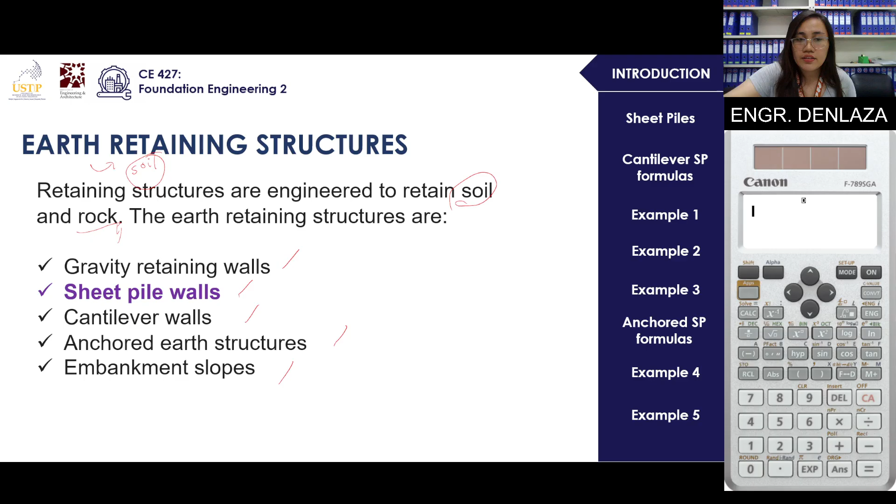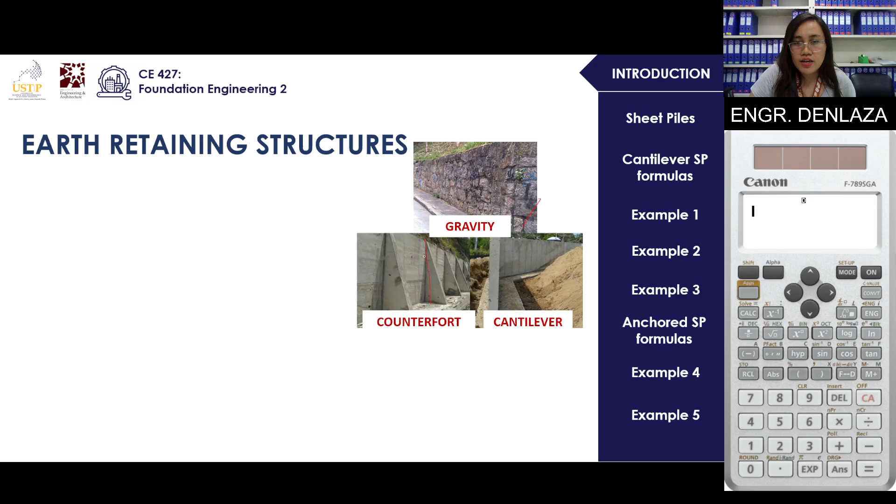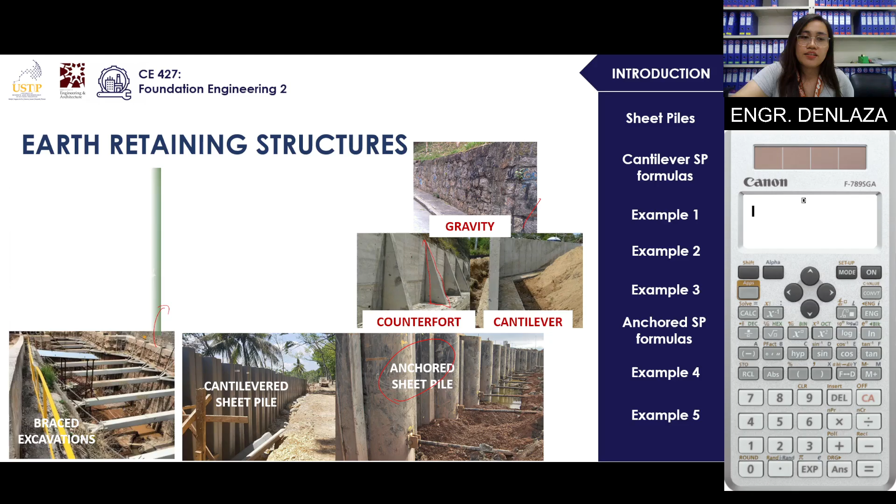Okay, so this is what I mean by earth retaining structures in real life scenarios, guys. There's the gravity retaining wall, as you can see. There's the counterfort - if you notice the bracing which is in the shape of a triangle - and the cantilever. Then here are the anchored sheet piles, the cantilever sheet piles, and braced excavations. Braced excavation will be discussed next week - braced cuts, braced excavation, or braced shorings, as well as your coffer dams. So that's how I'd introduce it.

So let's start with the sheet piles. Sheet piles, okay. Let's try to tackle first the types of sheet piles.

There are several types of sheet piles, by the way, guys. There are sheet piles made of cement, fiber reinforced plastic, wood, and the most common nowadays, especially with the ongoing news, are steel and iron. I think it's a balance between affordability - being economical - and accessibility or portability, since it's easy to install compared to others. Although some others are easy too, but it probably costs more, or it could be the other way around.

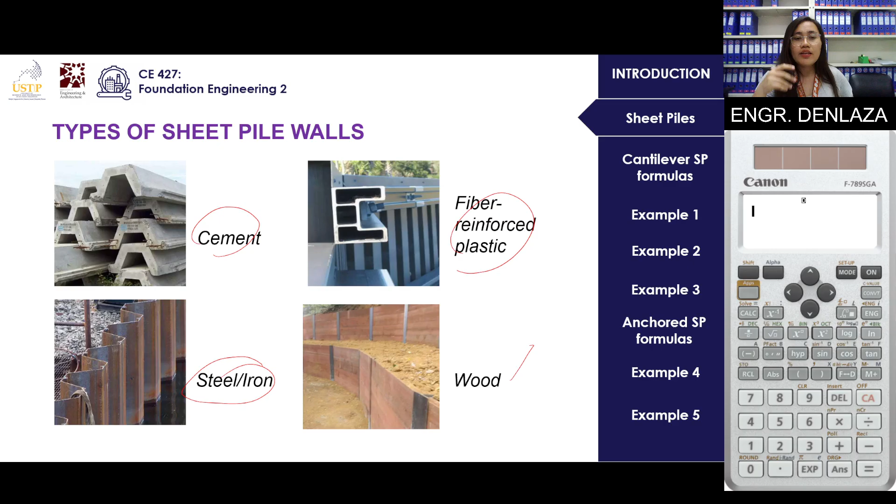I think steel and iron are the most common ones, and that's what you see in the news - where it was said that the depth or original length of the sheet pile should be 12 meters, but it turns out when they pulled it, it was only around 6 meters in length that was embedded. So that's the kind you see in the news - these are examples of steel or iron sheet piles.

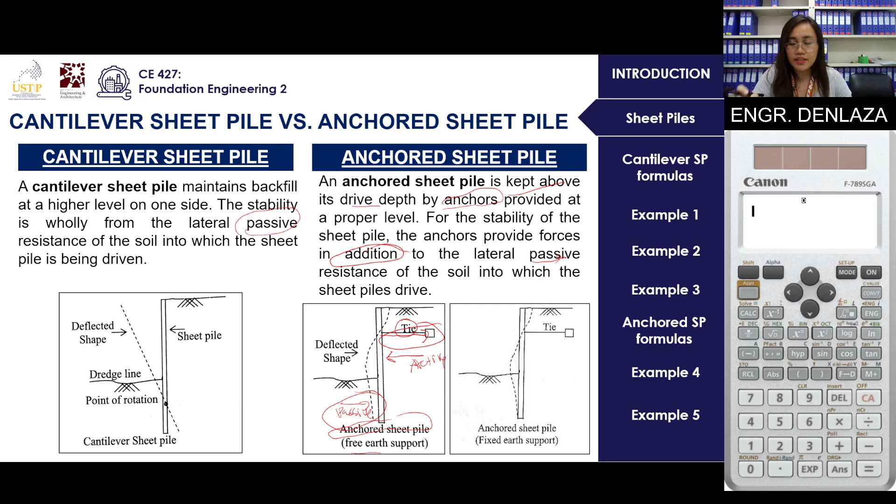So there are two types of support methods for anchored sheet piles: free earth and fixed earth, wherein for free earth it can rotate, and for fixed earth it is cast in place.

So let's try to analyze a problem dealing with cantilever sheet piles. Now let's try to solve a problem. We don't have formulas yet, so let's check first.

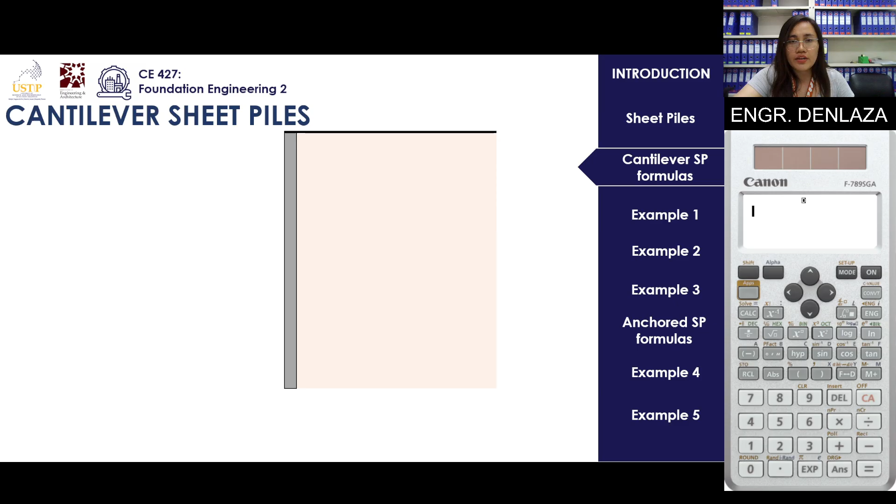This is your earth retaining structure, the top of backfill, and this is your dredge line. Let's label them as height H and depth D. This is what is meant by the dredge line, where you can see it.

And this pressure diagram, who can tell me if it is active or passive? What kind of pressure diagram is it? It pertains to... okay, this pertains to your active pressure.

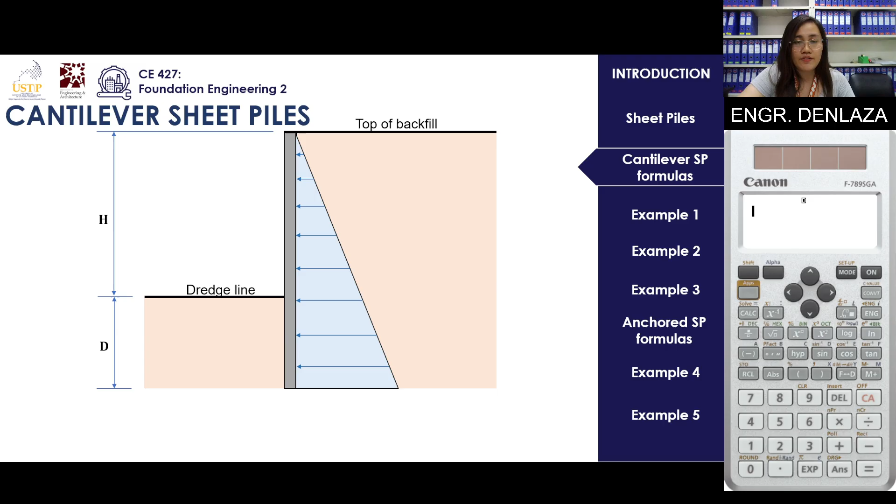That's active earth pressure, and this is your stress at the bottom. You know that when dealing with force, especially the triangle, the centroid of a triangle could be at 2/3 or at 1/3. So this is designated as FA and it has this formula: 1/2 stress times H plus D.

Is this a new formula or not? It's not new. Remember before, stress is equal to what? Gamma H KA, right? Gamma H KA.

And this is just plugged in here. Remember we have this formula for force: 1/2 gamma H squared KA. So this squared height here is factored out because what you're using here is stress. So this other H here pertains to this height. So H plus D, the total of that, is just the height.

Similarly, for the pressure diagram, it's the area. So the base is your stress, right? Remember I told you that stress is the base, and in order to get the entire force, all you have to do is use the area of the pressure diagram. So that's going to be one half base, which is your stress, times the height.

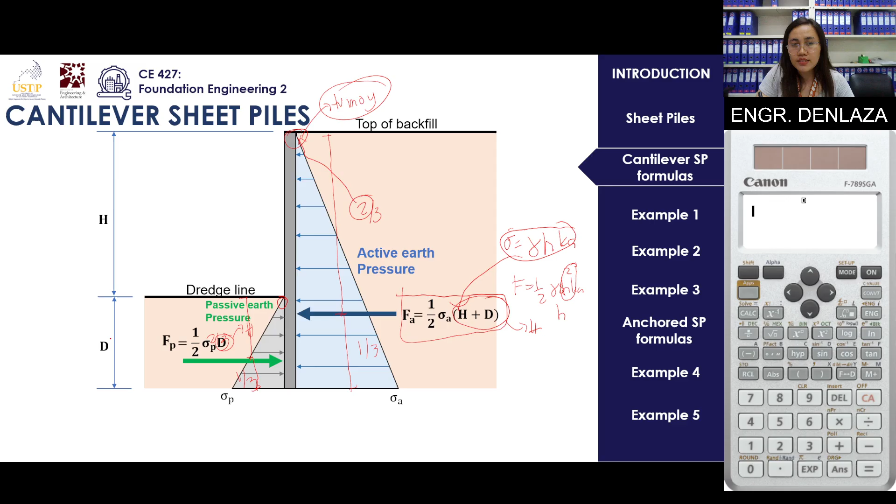And we treated D here as our sole height because you cannot say it's still H plus D, because if you notice, the passive earth pressure is at the dredge line and below - it doesn't reach above the dredge line. So note that H is the depth of soil retained, height of backfill, and D is the depth of embedment or depth of penetration.

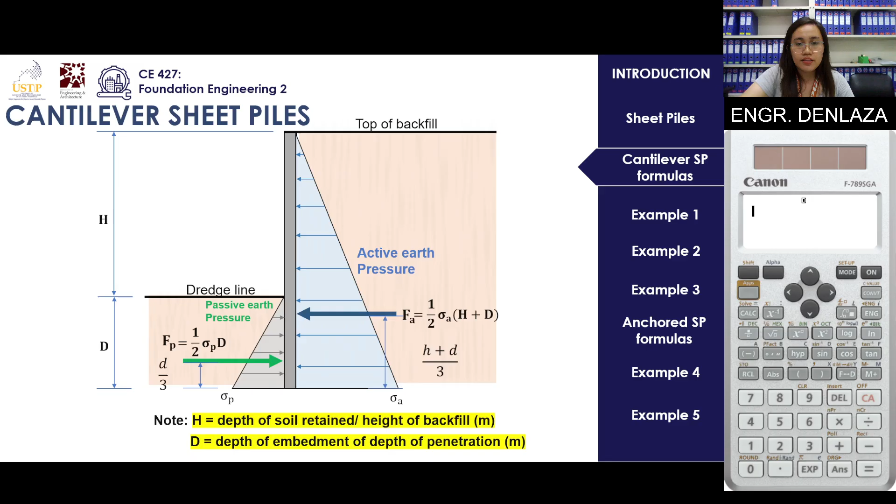If you're asked to get the location from the bottom, that's just going to be H plus D over 3, and D over 3. But if you're talking about from the top of the backfill or the dredge line itself, that's another story - that's going to be two-thirds. There are more equations involved. So if you are to take moments, typically it's at the bottom for cantilever piles, unless there's something from the top of the surface. So typically you take moment at the bottom - don't forget the coefficients for the equations and the pressure.

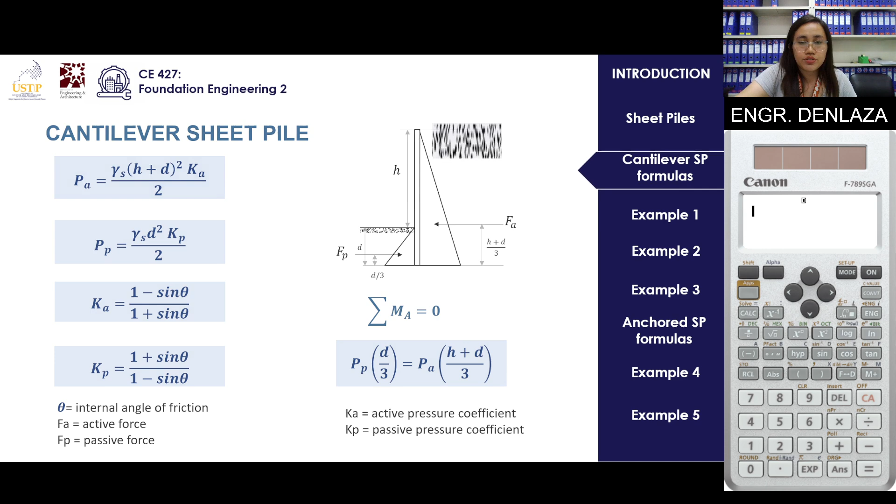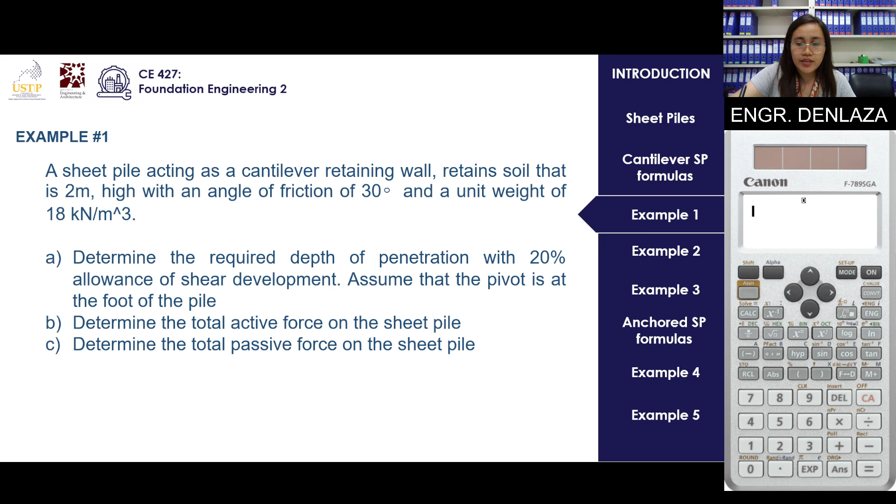Let's try to solve example number 1. A sheet pile acting as a cantilever retaining wall retains soil that is 2m high with an angle of friction of 30 degrees and a unit weight of 18 kilonewton per cubic meter. Determine the required depth of penetration with 20% allowance of shear development. Assume that the pivot is at the foot of the pile - meaning you take moment at the bottom of the pile. Also determine the total active force and the passive force for letter C. Let's solve this problem.

For letter A, let's look at the solution - first make your illustration. You have the backfill with height of 2m, and below that is D, the depth which is unknown. By default, for these kinds of problems, when you see an angle given, as long as they're not asking for something else, automatically get both the active and passive coefficients, or just active if passive isn't needed. So always the first step is to illustrate, then get the values for the coefficients.

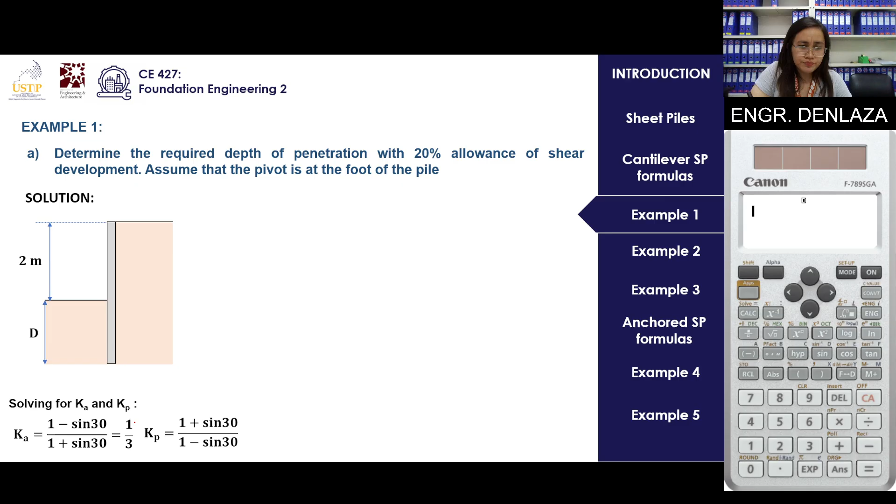Get Ka and Kp. Ka is going to be 1 minus sine 30, which is 1/3. Then Kp is 1 plus sine 30. Is that right? If you flip it - the coefficient of active is the inverse of passive. So if this is 1/3, what's the reciprocal of 1/3? That's 3. So you don't need to stress yourself over these coefficients.

Let's illustrate your active side. That denotes your active stress, and here's the existing formula - that's going to be 1/2 times H plus D. H here is labeled with value 2m. But the D, or the depth of penetration, is yet unknown - that's what we're solving for. For the passive side, here's the equation - that's going to be 1/2 stress, P, and we're solving for FA and FP.

Let's expound the stress for FA that we're solving. The equation should be gamma times H times KA. Gamma is 18. H is 2 plus D, because it's the entire height of your pressure diagram. Then 1/3 is your KA. So we have 2 plus D there. This is the equation - always don't forget about this.

To simplify this equation, you don't need to solve for the value of D yet. What you do is isolate all the constants that don't enclose the 2 plus D term. Just retain this 2 plus D itself - squared. So simplify 1/2 times 18 times 1/3. That's the simplification. If you still don't understand how to simplify this when it seems difficult, just put in a value of 1 for it temporarily - treat it as 1 - and you will get the value. I think you'll get 3 here. So just what do they call this?

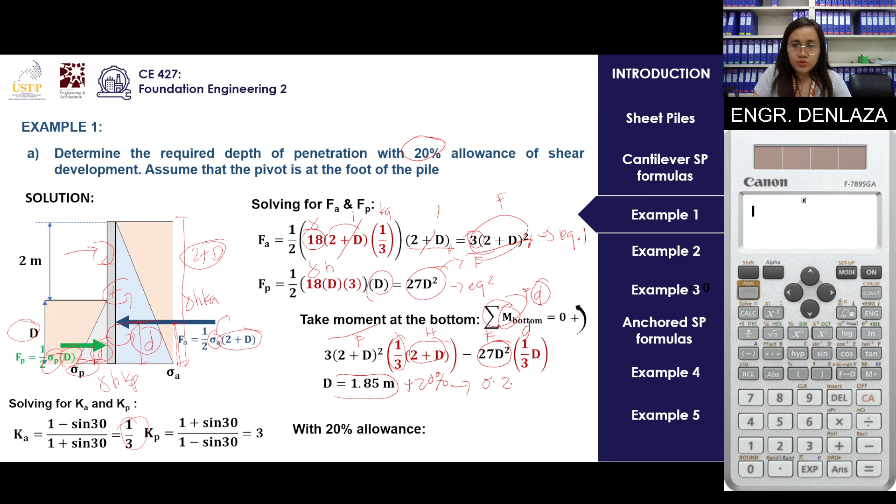How do we add 20%? What you do is just multiply it by 1.2. How do we convert 20%? That's 0.2, in decimal. But why 1.2, and not just 0.2? Because you assume the whole is 100%, which converts to 1. But since you're adding 20%, it's 1 plus 0.2, which gives you 1.2.

So all you have to do is multiply 1.85 by 1.2 and you will get 2.22 meters. So that's your final answer for this first problem.

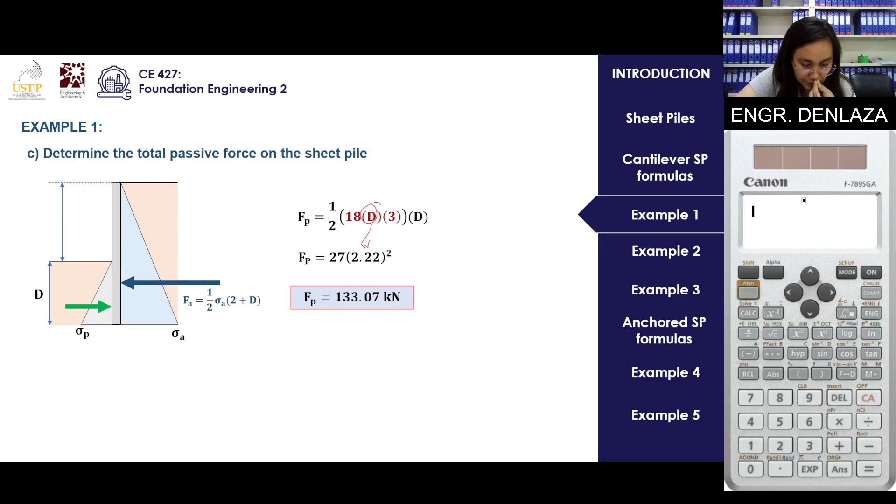Now what if we are asked to find the factor of safety of the sheet pile? How do we do that? Since we already have two values obtained, which are the active and passive, you get the ratio of the two: passive over active.

This ratio should be greater than 1. Recall from before: when can you say a structure is stable? If your factor of safety is greater than or equal to 1. If it goes below that, failure occurs and your structure will fail. So always consider designing with a factor of safety greater than 1.

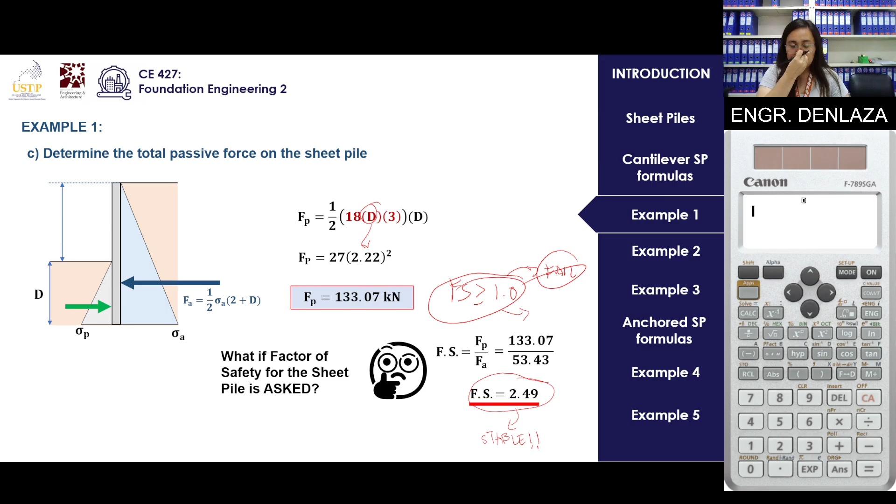Example number 2: A vertical sheet pile supports a horizontal backfill having a height of 4.5 meters. The backfill has a unit weight of 19.67 kilonewton per cubic meter and an angle of internal friction of 35 degrees. Calculate the depth of penetration, the total active force, and the maximum bending moment in the cantilever sheet pile.

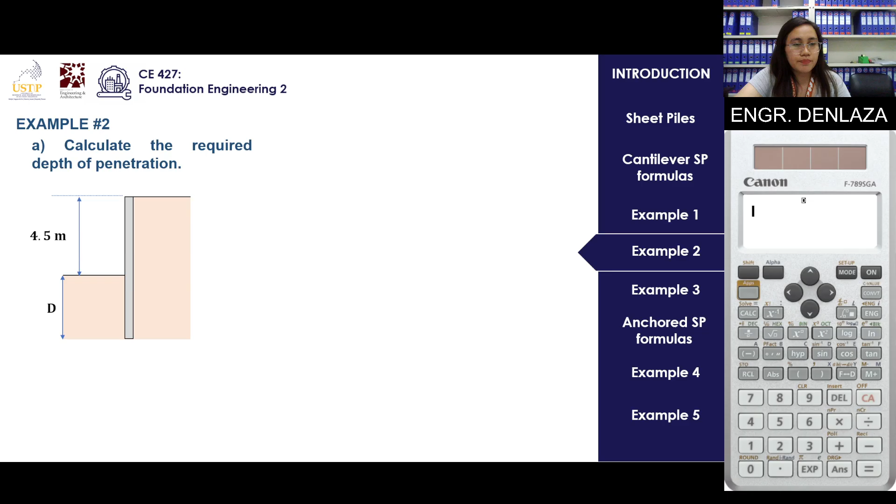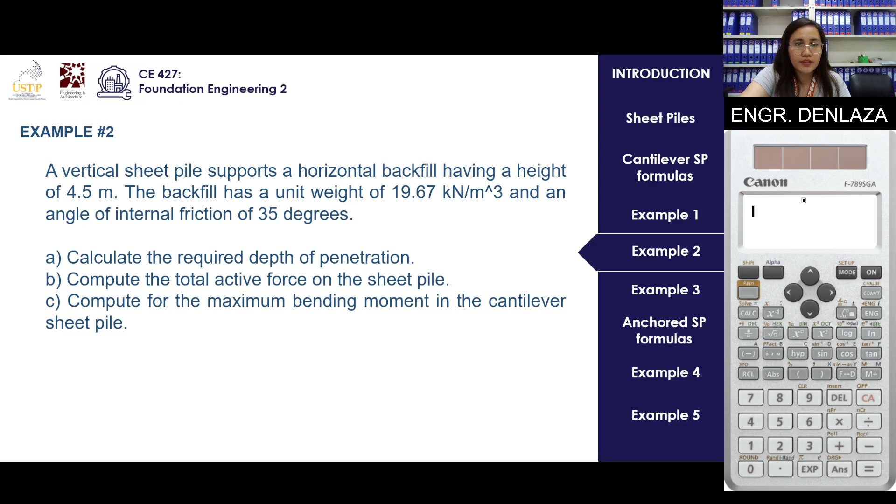So solving for Ka and Kp, this is the default process - solving for coefficients at 35 degrees. The inverse of that is 3.691. Nothing else to do, just obtain that, similar to before.

Using gamma 19.67, quantity 4.5 plus D, multiplied by your Ka, multiplied by 4.5 plus D, you will get a simplified version of 2.665 times quantity 4.5 plus D squared.

How about your F passive? This is 1/2 gamma D times 3.691, which is your coefficient of passive, times your height D. Simplify that equation and you will obtain 36.301 D squared.

Now we are to take the moment at the bottom. This is one approach that I feel students understand better: whatever goes right, you equate to the left. So moments equal each other.

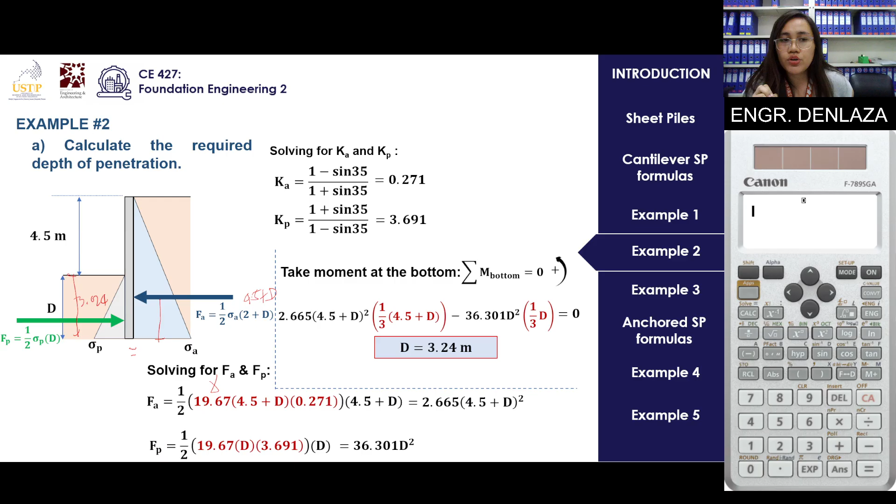So you know the height here becomes 3.24. So if it's 3.24, then 4.5 plus 3.24 will be your total height for your sheet pile.

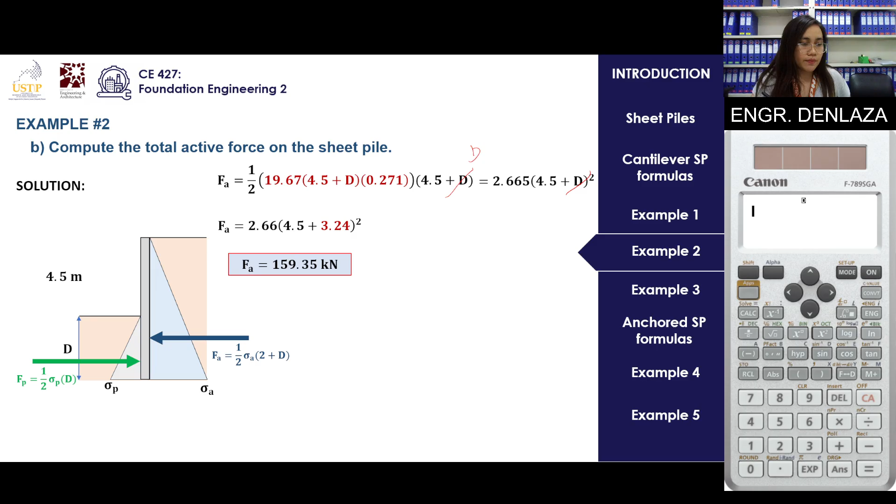Now compute the total active force, just simplify. Since it's already in terms of D, substitute D directly. D is 3.24, simplify and you will get 159.35. That's easy. Now, how about the maximum bending moment in the cantilever sheet pile?

Recall the MDB. For maximum moment, where does it occur? Typically in any scenario, you assume what goes left so you don't get confused. Treat it so that the passive and active forces equate to each other. So here's the scenario.

So take the moment at the bottom, typically at the bottom for maximum bending moment. Substitute the equation and then put the value of D there since it's already in terms of D.

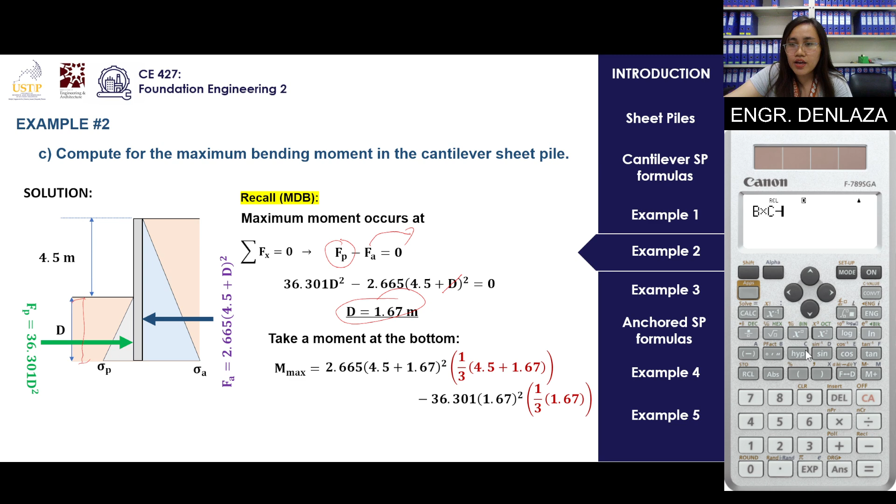So all you have to do is shift B, multiply it by the magnitude of force A, multiply it by the lever arm which is C, plus, minus, sorry minus, D times E. Check if they're the same. Hopefully the same, that's going to be, correct, approximately 152.30.

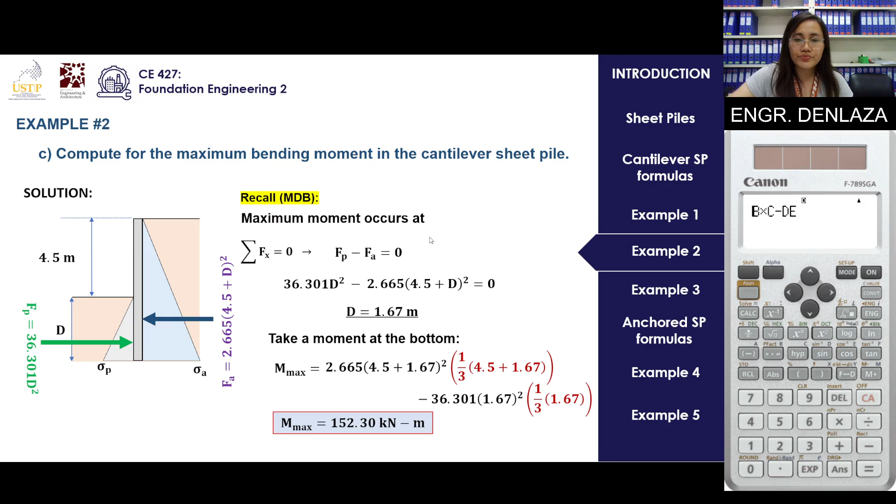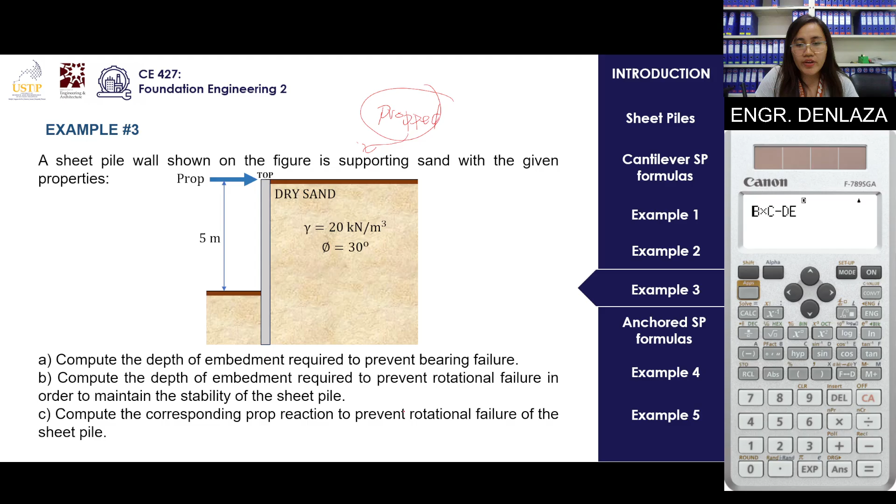Example number 3: A sheet pile wall shown in the figure is supporting sand with given properties, including a prop support. A sheet pile is considered propped, meaning it has support. The given properties include gamma and angle of internal friction. We need to compute the depth of embedment required to prevent bearing failure, compute the depth of embedment required to prevent rotational failure to maintain stability of the sheet pile, and compute the corresponding prop reaction to prevent rotational failure. Let's start.

To prevent bearing failure, the active pressure and passive pressure must be equal. So the active pressure should be equated with the passive pressure. This means we need to analyze the mechanism and visualize the diagram.

Recall our equation: stress equals gamma times height times Ka. Since 5 is our depth of embedment with the backfill, the total height becomes 5 plus D, which is the total height of the active pressure side of the sheet pile. Equate this to the stress P, which is gamma times D times Kp, the passive coefficient. The difference between the two is the height, since the entire height of the sheet pile differs from the depth of embedment used for the passive side.

First, always solve for Ka and Kp given the angle of internal friction. For an angle of 30 degrees, Ka is always 1/3 (or 0.33) and Kp is always 3. So you don't need to resolve this every time, but initially you should know how to derive it yourself.

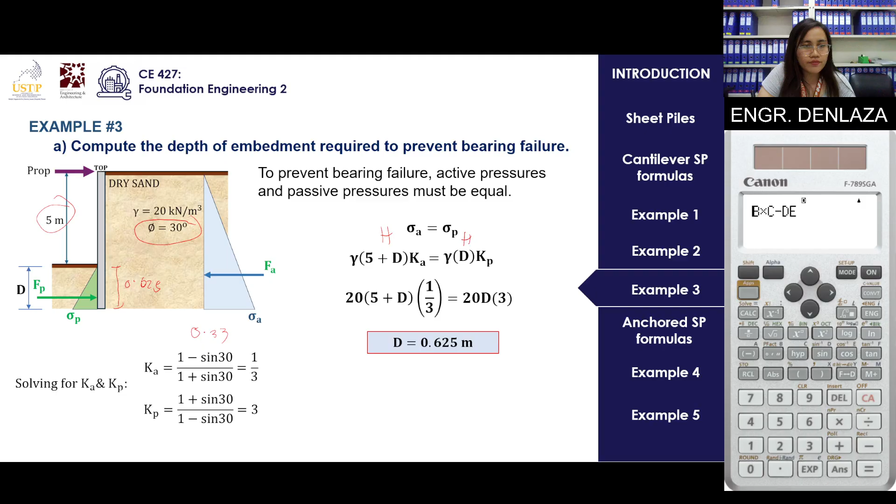If you wanted to prevent bearing failure, that's a different scenario compared to considering a different failure mechanism. So now compute the depth of embedment required to prevent rotational failure in order to maintain the stability of the sheet pile. Using the same diagram, we get the force active here, which is the same stress as before.

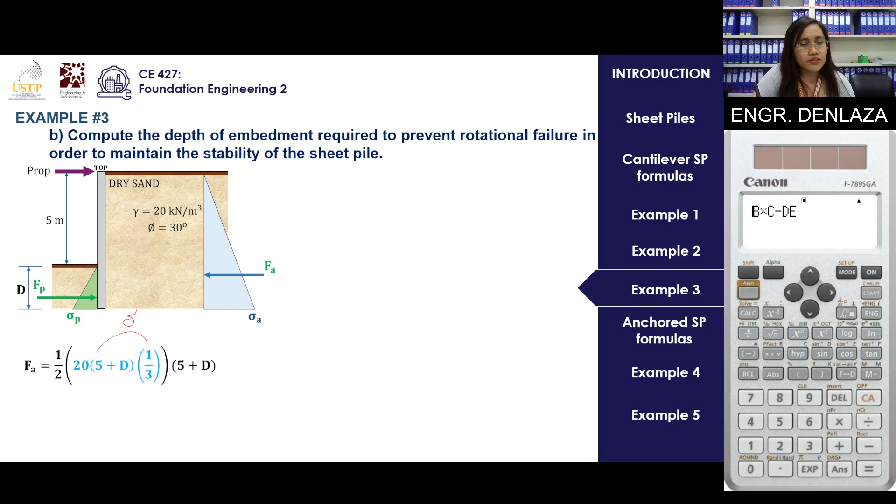Times another height component: 1/2 base times height. Simplifying that equation, you'll get 10/3 times (5 plus D) squared. Now for the passive side, simplifying this equation—this is again the stress times height—you will get 30D squared.

To prevent rotational failure, the moment at any point must equal zero. We take the moment at the top to eliminate the prop. Notice that at this point, you have no value for your passive force and no value for your active force directly, but typically for a cantilever, moments are taken at the bottom. However, in this case, since there's an added prop support, if you take the moment at the bottom you'll have three unknown variables. Since the prop reaction is unknown, it's better to take the moment at the location where the support acts, so that the prop term is eliminated and you don't need to solve for it separately.

So we take the moment at the top, with counterclockwise positive. We have 10/3 times (5 plus D) squared, and the lever arm for this would be (5 plus D) multiplied by 2/3, since that's the distance to where the force acts.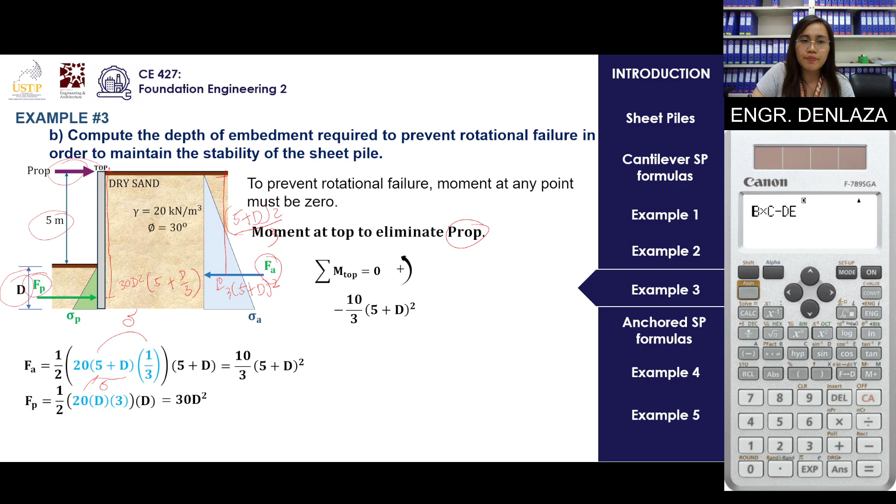For the passive side, this is 30D squared, and the lever arm should not be (5 plus D) over 3, because not the entire height of 5 is included in the passive pressure diagram—it's just the height of the embedment below the backfill. So the one-third distance should only be based on the height where the passive force acts, which is D over 3. Wait, actually it should be 2D/3 for this term, since 2/3 times D is the correct lever arm. So we simplify using 10/3 and 2/3 accordingly.

Okay, same ra lagi. So ang problem na lang nato ani is ang signs. So here in our solution, i-assume na to is counter positive. So since baliktad ang rotation ani, ani na lang gid para dali sa inyo ang kinabuhi, i-equate na lang gid ninyo what goes left, what goes right, ana na lang para mas masabtan na ninyo.

Dali ra na siya. So 2 thirds, sakto ba? 2 thirds, 5 plus d, sakto. Then 2 thirds d plus 5. So mo to siya, equate ni mo, and equate ni mo siya to 0 sa iyang equilibrium. Now simplify, you will get 2 meters, and that's the final answer for this problem alone.

So if maglibog mo, kalibog lagi kung sa kamo negative, kung sa kamo positive, imo na lang buhaton, ayan na lang ni bali-baliha ang sign. Pero instead nga plus minus, equate nila siya sa 0. Ang galaga nila siya, so para imuhang makuha.

Sige, try na to ha, sampulan na to nga kuan, yes CA. So i-equate na to ba? Sampulan na to ba nga para makita niyo nga same ra gyud na siya kung maglibog mo sa sign. Pero I know nga naman dili kabaluan na, so okay ra kay na, para lang gyud tos uban ba nga dili gyud pag ka master na.

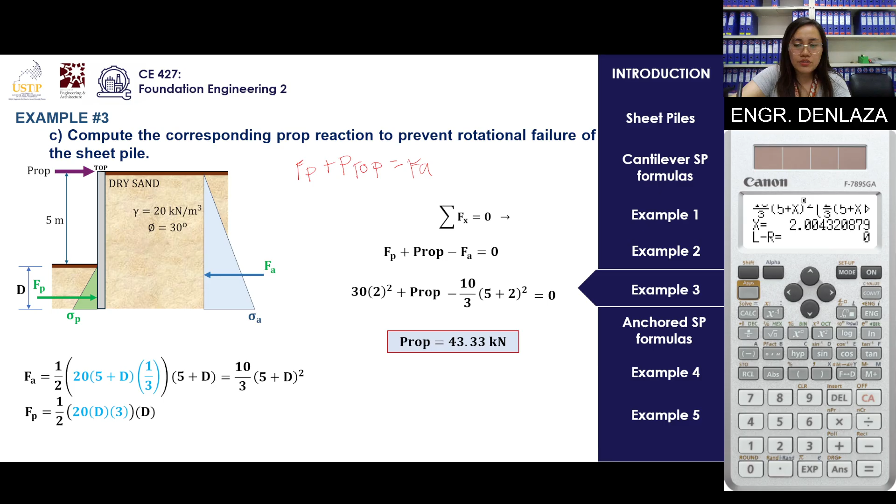Okay? Okay na, nasabtan na to? Na part kay mas hangat gamay ang sheet pile, taas og solution, kailangan kay hindi ko siya lisod kaayo, kasi maraming yapon siya, it's just that need lang ka makabalo. Ang tricky lang na part is ang pag-determine sa imong distances sa imong mga location sa magnitude sa imong mga forces. Okay na ta? Sige.

Let's go to the analysis of anchored sheet piles. Ano size no, on our curriculum class.

Wait lang, check sa nako kay nailag-mention. Boom, baha. Hala. Baha, ulan le kayo guys. Hala. Ulan le kayo, Loy kay. Baha ang mobile classroom, kung asa tanag kuan, basta agad siya, nag-chat sila sa GC. Anyways.

Analysis of anchored sheet piles. Yee, dirita, mota kung giingon nga tungod kay naay tendency nga lako ang values manggod sa imong active, to add more force sa imong mo resist bitaw para dili mag-overturn imong retaining structure. Usually ga-add ta og anchor or tie rod, gabutang ta para magdungag siya support sa imong passive. So assumes in the anchor, I mean in the free earth support, guys, it assumes that the sheet pile is free to move away. So free earth support, but kasabot, pwede na siya free to move away, based on Rankine or Coulomb and it's not rigidly connected to any of its surrounding.

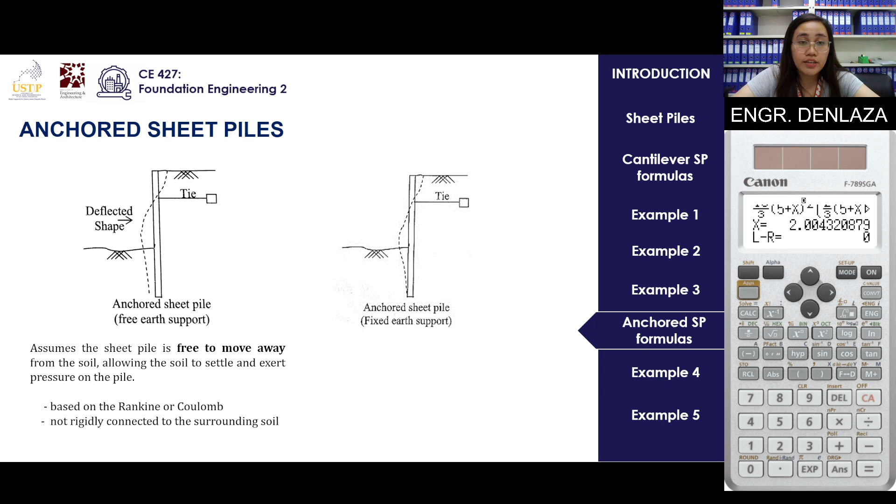When you compare free earth support with the fixed earth support, it's definitely different in the sense that fixed earth support is rigidly fixed, from the name itself. It prevents soil settlement, resulting in more uniform pressure distribution. It is based on the at-rest pressure, not active and passive, and it's rigidly connected to the surrounding soil.

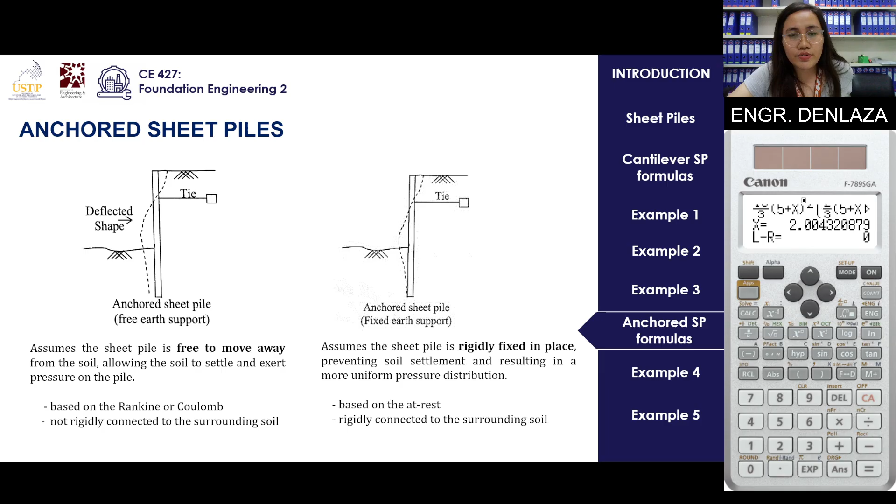Let's do an illustration before that. So what does your pressure diagram look like when we are talking about free earth anchor sheet pile? Since we now have the presence of the anchor, there is an added contribution to your pressure diagram. So this is what it looks like.

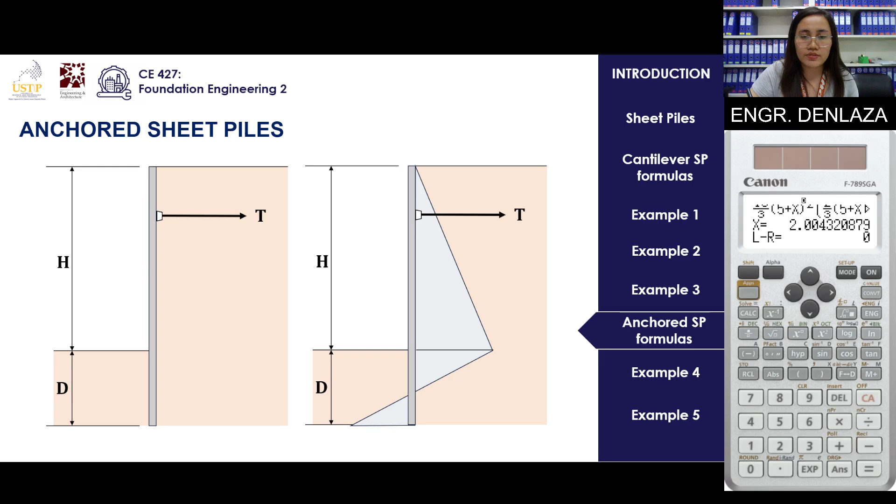Now let's get familiar with the components you should watch for in free earth support, the forces or pressures present in your diagram. In free earth support, if you notice, there are three shapes, although triangular, shape two and then shape three. Technically, if you break down the pressure, you can also separate it into three forces. That's why we have force 1, force 2, and force 3.

Now let's go to the pressures. Similar to cantilever sheet piles, guys, we have H, and then at the bottom there is the depth. But now, since we have an additional force...

...where the passive was previously split, we introduce another variable designating the height of force 2, which is typically denoted as y. The remaining difference between the depth of penetration and y is designated as h. So the height from the dredge line down to where your value is 0 is designated as y, and the remainder beyond that going down is designated as h. It goes straight down to the ground, not just as a location of your third force, okay?

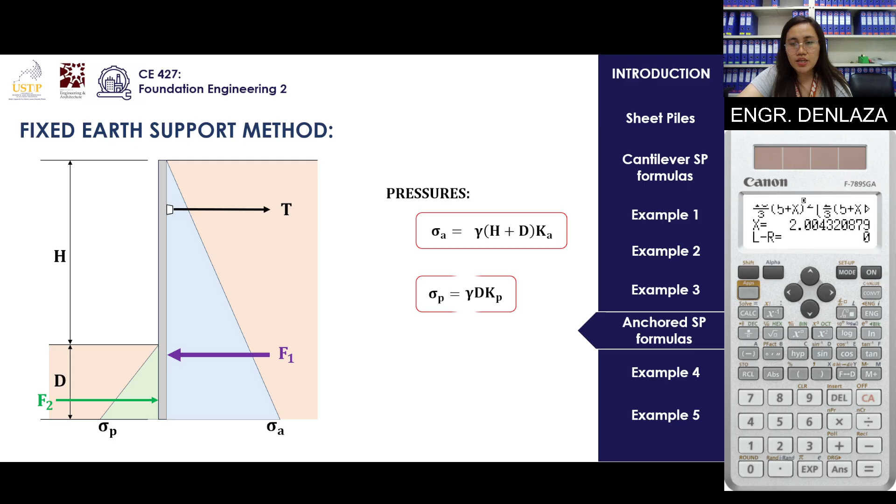An excavation 7.5 meters deep is to be made in a cohesionless soil for which the unit weight is 18.15 and an angle of internal friction of 28. The side of the excavation is to be supported by anchor sheet piling with anchor ties 1.2 m below the surface. Assuming free earth support method, compute the total active force, minimum length of the sheet pile, and the tension at the anchor bolt.

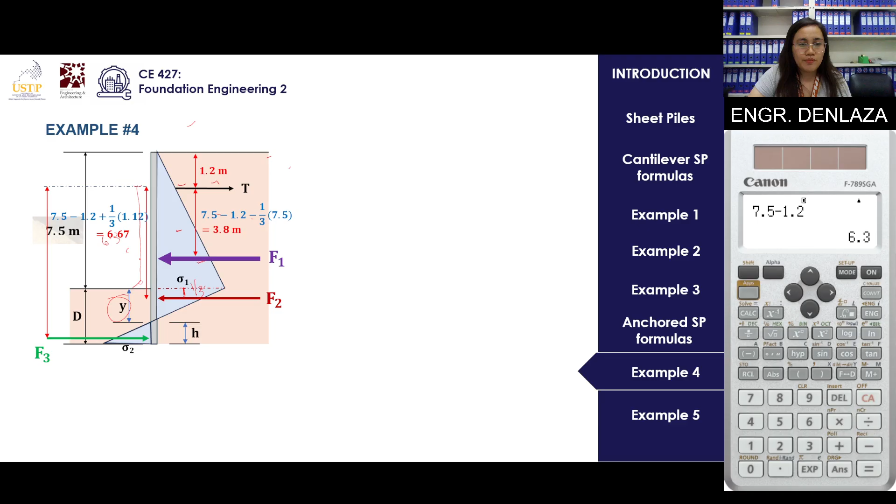And lastly is determining the height. I designated this since y is still unknown, it was left for last. Next is the third value of your force, that's 6.3, right? This height is 6.3 plus y plus 2/3 of height h. So technically, to get this red height, what you do is just 6.3 plus height y plus 2/3 of your height h. If height h is not given, since y is already obtained, all you have to do is subtract d minus y.

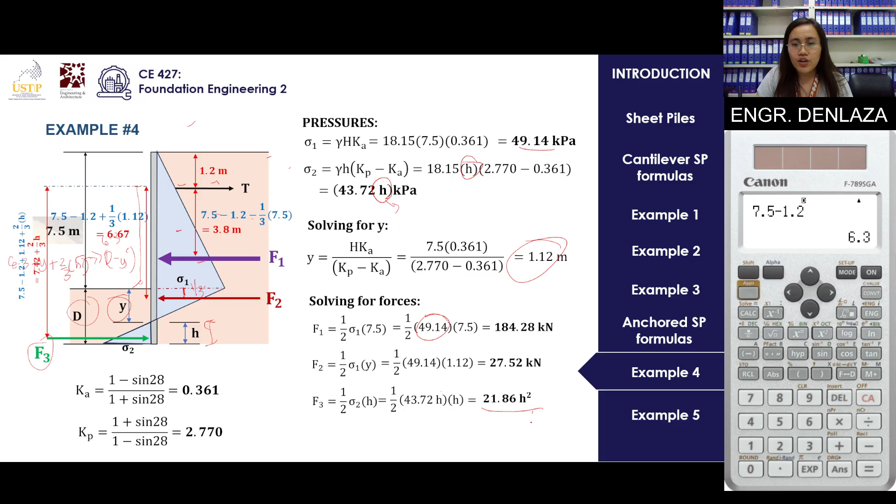We're not using D minus y anymore since we already have H. That's fine, that's fine. Solving for forces: that's 1/2 base times height, 7.5 for 49, which comes from 49.14. And then force 2, that is 1/2 stress times its height y, which is still 49.14, 1.12, giving us 27.52. Now for your force 3, since h is unknown, 43.72 h times h, so we get a simplified equation of 21.86 h squared. We're not done yet because we haven't found our active force.

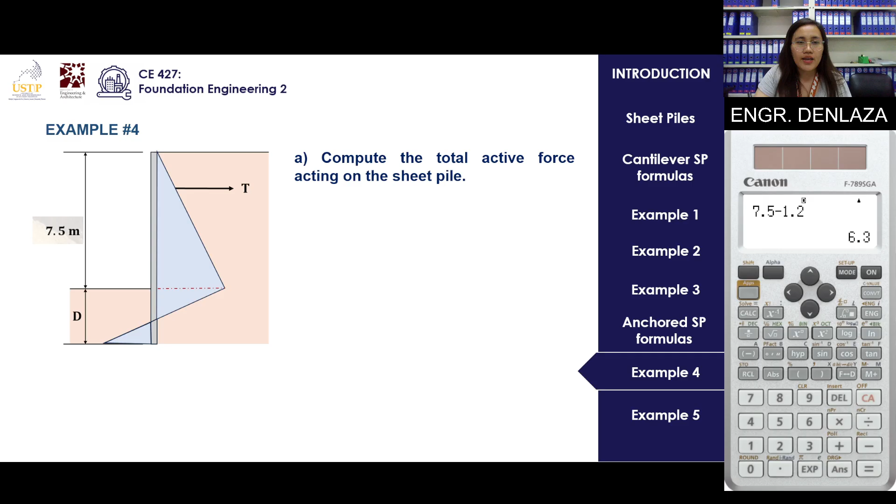So technically we've already solved for active force, because if you look at how active force is understood, it's the forces that go away from the soil. So if this is your soil, technically force 1 and force 2 are my active pressures. Since we've already solved force 1 and force 2, we've already obtained their values. So automatically, to get the total active force, just add force 1 and force 2, because these are the forces that go away from your soil. So 184.28 plus 27.52 gives you a total active force acting on the sheet pile of 211.80.

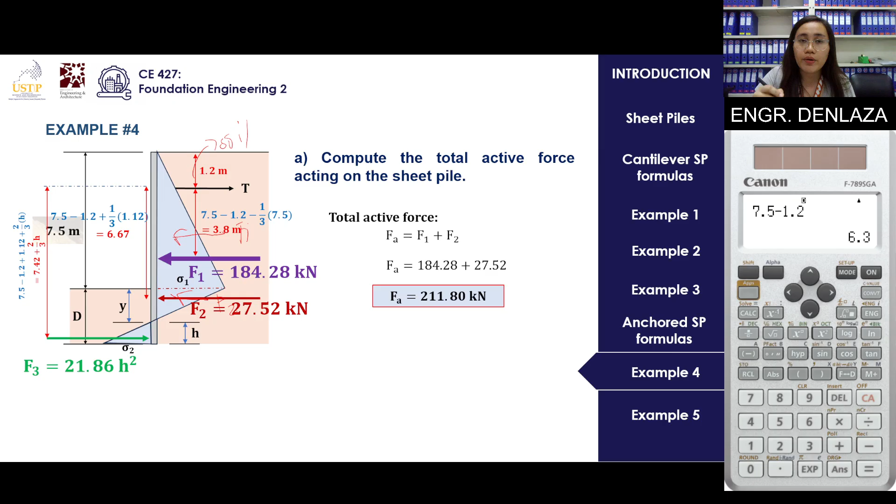Now, second question: compute the minimum length of the sheet pile for equilibrium.

Let's continue with the animation. So moment at the anchor tie, this is where you take the moment. Since the anchor is here, you take the moment at the anchored tie. So that is just 184.28 times 3.8, plus 27.52 times 6.67, which equals... we can just calculate this.

Let's calculate this. So again, 184.28 times 3.8 — many of you may have already gotten these values. 184.28 is the force, and its distance towards moment A, that's 3.8. Plus...

Don't forget force 2. 27.52 times — what is the height from force 2 going towards the anchor bolt? That is 6.67. So this equals, going towards the right, that's 21.86. And H is unknown, right?

H squared is unknown, so your goal is to find H. Multiplied by — what is the height from this green point going towards the anchor? That is obtained as 7.42 plus 2/3 of H. So that means it is 6.3 plus 1.12 plus 2/3 of this H. It becomes 7.42 plus 2/3 of your H, which is the distance you need to solve.

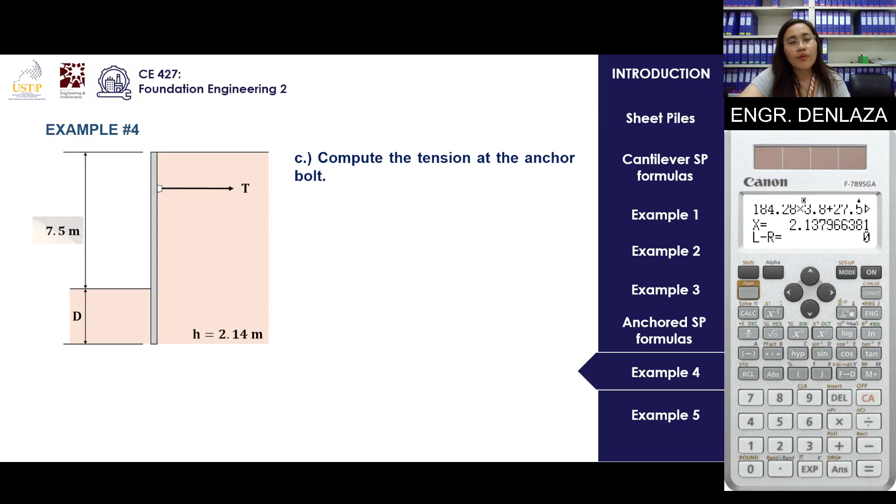Next question, compute the value of its tension at the anchor bolt. So all you have to do is just to sum forces along x. Forces along x lang ka ani, ikinan mo kay mga values. Ba h nimo is ilang tayo h? It's 2.14. So imong buhaton ana, it is just the t plus 21.86 times 2.14 is equals to 184.28 plus 27.52. So kuha ni mo si tension na value.

Pila na siya? 111.69. So check na lang na to. X plus 21.86 times 2.14 squared equals to 184.28 plus 27.52. Should solve to 111.69. Ito ra, sakto din na siya, so para dili mo maglibog.

So, last problem. Sige. Katawag ko ng last problem.

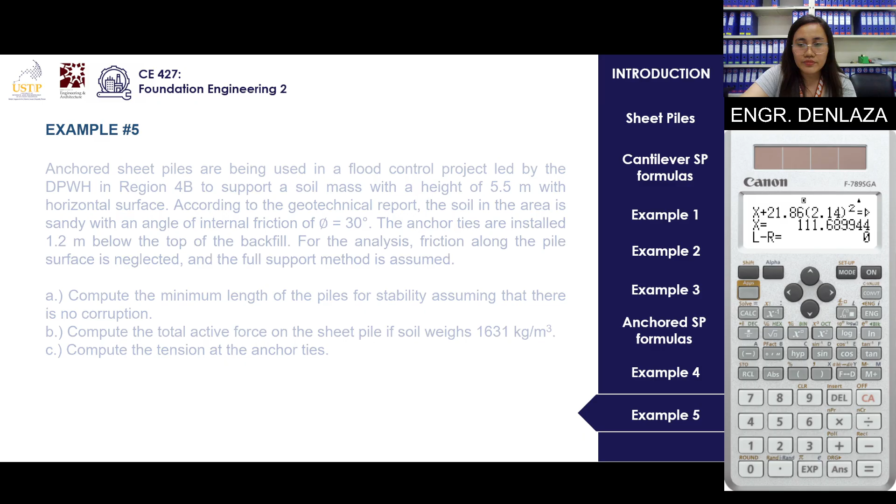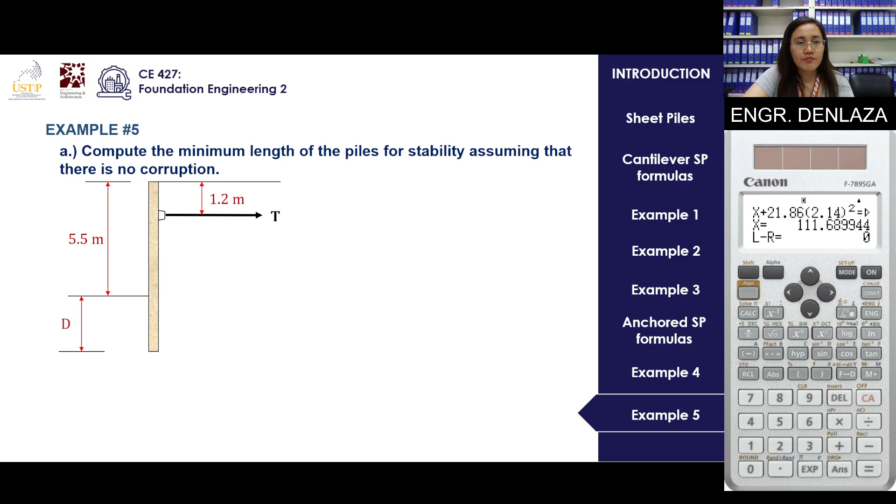First is minimum length lang of piles. So muna siya ang imong itsura sa imong earth retaining structure, 1.2 m below the ground ang imong tension rod, and ang backfill, height is 5.5, and your D is unknown yet. Pressure diagram for the active goes like that, and this is for your passive. Muna siya imong forces 1 and forces 2. So by default, kuha na to si active and kuha na to si passive.

After that, pressures na to, forces, gamma H KA, stress, that is gamma 5.5 plus D since unknown pa man nato si D, times 1/3, and that's 5.5 plus D over 3 gamma. For the stress 2 or your passive stress, that's gamma D times 3, which is height, and then 3 is the coefficient of passive. So 3 D gamma, and forces, all you have to do is just to get the area, 1/2 base or 1/2 stress times its height. So this is, if this is your stress A, this is your height.

So that is 1/2, 5.5 plus D, multiplied by gamma over 3, that's 5.5 plus d, and F1 is simplified to this equation, 1/6 gamma, 5.5 plus d squared. And for your passive force, what, 1/2 base or your stress times the height, simplify. So unsa ano man pud ni pagkuha sa mga forces nato, na-reveal naman.

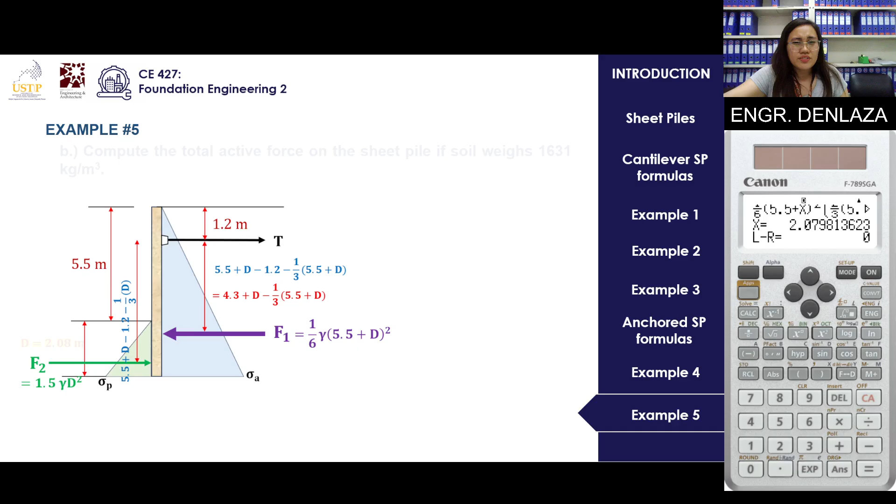That's just A. How about B? Compute the total active force on the sheet pile if soil weighs.

1631 kilograms per cubic meter. Total active force, here's your equation. And last time students converted 1,500 divided by 1,000 to make it 15 kilonewton per cubic meter.

That was wrong. So for the technique, just take this, multiply it with 9.81, then divide by 1,000. You'll be able to get the unit weight. It depends on whether the given value last time was in cubic or not.

So, total active force: gamma is 16, plug in D, your depth of embedment, to be 2.08, and the value for your active pressure is 153.22.

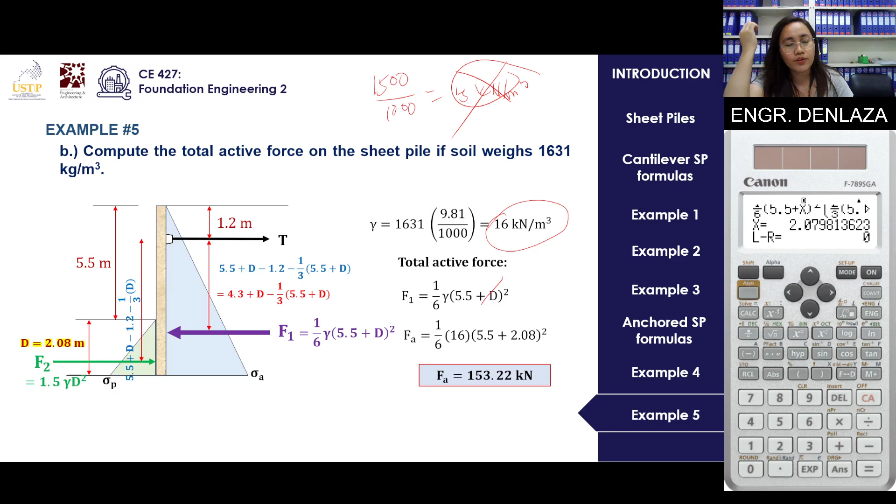Next, to compute the tension at the anchor, all you have to do is sum forces along X. Whatever goes right equals whatever goes left. So that gives us 1.5 gamma d squared.